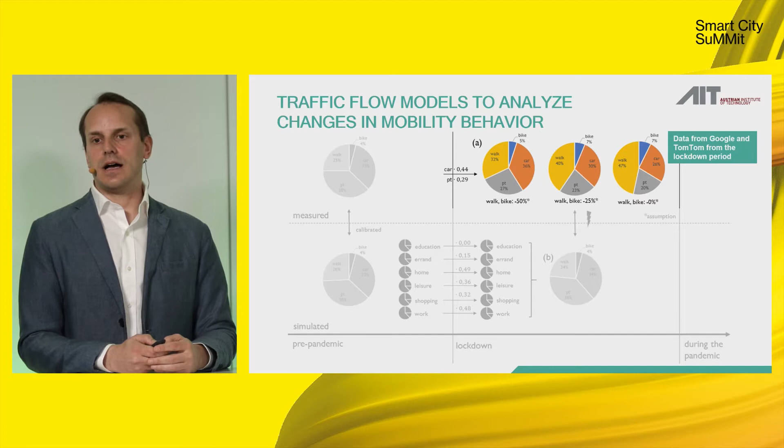If we look now during the pandemic, we collect data from Google and TomTom. They made this data publicly available, and we can use that for our research. We see how the modal shift has changed, a decrease, as we said before, in different usages of public transport. The interesting question is how we can investigate that with our model when we look into the different activities. For instance, during the lockdown, education trip purposes were completely at zero. There was a strong decrease in shopping and so on.

So there are two takeaways when we apply our simulation tool here. The first one is that if we look at the simulation model calibrated on the activities, we cannot really reflect the modal split. There is a difference between what people did in the modal split and what the model predicts, which gives us insight that we need to look into how mobility behavior has changed for each individual activity.

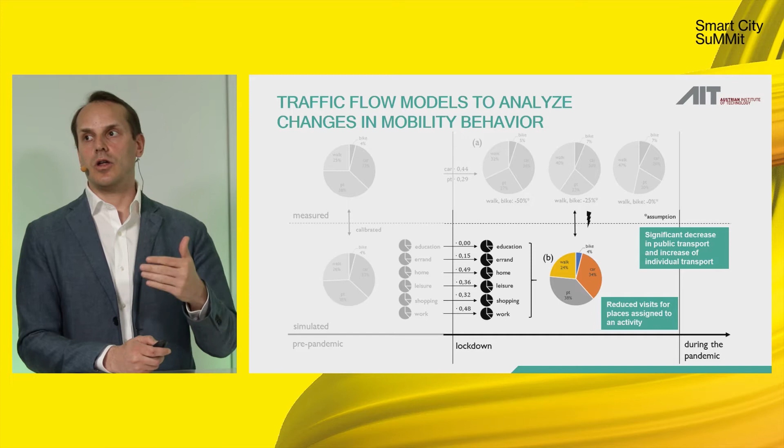The second takeaway is, with the data that we have available, we can calibrate our models and use them ideally for predictions during the pandemic, but also later on as we see a way out into a different mobility behavior. These types of models are very helpful to test and assess different strategies in our mobility system.

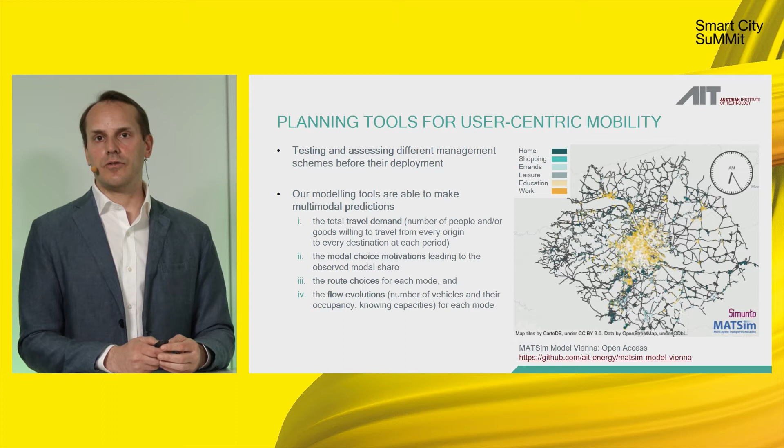They are able to represent our mobility behavior on the different choice levels, such as travel demand, how we plan our activities, but also mode choice, route choice, and finally the evaluation of the evolution of the flows. What we can see in this picture is a multi-agent simulation model, a MATSim model that we have developed for the city of Vienna, calibrated on the data of Vienna, and publicly available under the link you can see here.

This is something we do at AIT in our Urban Competence Hub, where we integrate the different domains of cities, so we can combine mobility, urban planning, energy, and climate to help cities become more sustainable and more resilient. And we have the different methods and tools to empower the different stakeholders, support decision making, and give a pathway to more climate neutral cities and sustainable living spaces.

So how are we doing this? One important tool that we have created is the City Intelligence Lab that Lena mentioned earlier. This is a digital platform that integrates different digital tools for interaction, planning tools based on simulation, and also artificial intelligence methods that can enhance and accelerate the planning process. And it's in very close collaboration with the cities, with the industry, but also with academic and research entities.

So we can see here the different impressions on the technologies that we apply, from the different visualizations towards augmented reality and virtual reality, that can help us in the planning process.

And I have brought one example from the City Intelligence Lab, our InFraReD project, which is basically the capability using a machine learning framework to have planning and simulations run in real time, so very fast, to see the outcomes if you plan cities in a different way, how that affects the different KPIs that we are interested in the city.

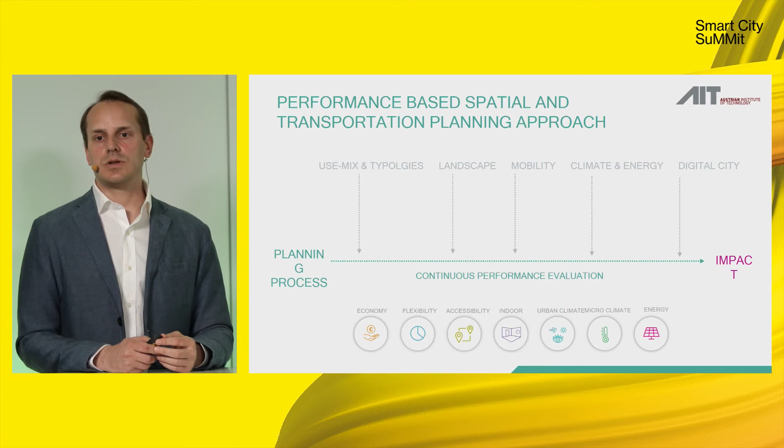So basically, our approach here is that we start with the impact at the end. So this is our main focus. And we have a performance-based spatial and transportation planning approach that accumulates all the different disciplines that we need, that we can see here, from landscaping to mobility to climate and energy and urban planning. And we can continuously assess the performance and measure it against the different KPIs that we can see here below.

And the parametric design methods that we have developed help us to understand how we can transform our urban spaces and how to efficiently develop these different design scenarios, and then also look into them in terms of solar radiation, wind flow, and so on.

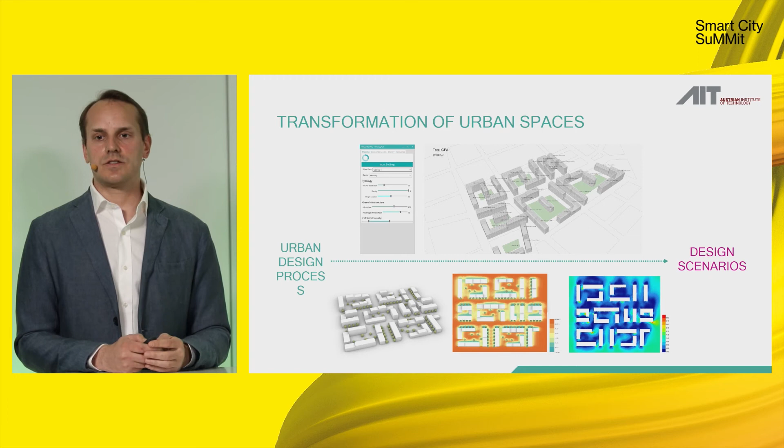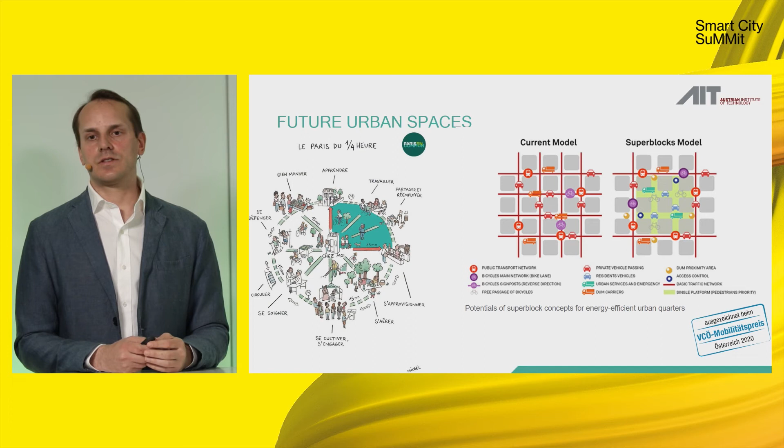Another aspect is, of course, that we can look at the impacts on accessibility on the different levels of the city. And this helps us to develop new concepts and understand how the 15-minute city or the superblock concept can help us to improve our cities also for resilience.

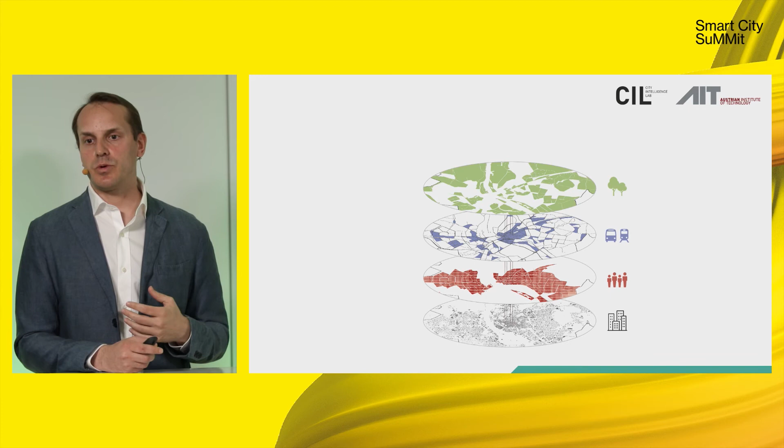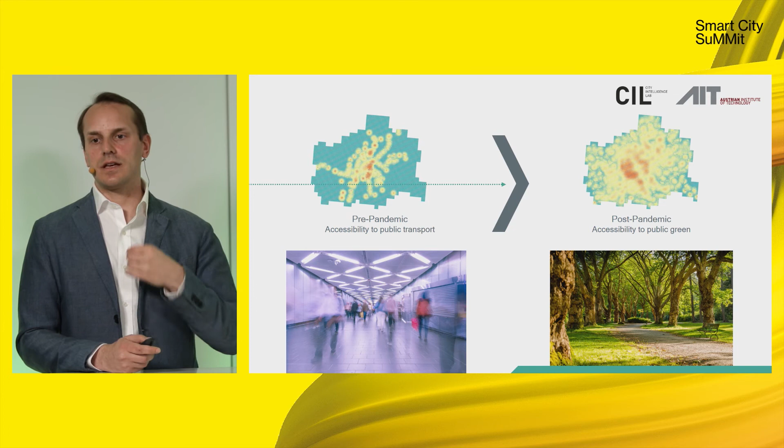How are we doing this? So we start with a layer of the built environment. We look at the demand, the public transport, the green area in the city, and then we can identify spots where we have to have a closer look. And at these spots, we can go more into the details, and we can better understand pre-pandemic, how was the use of public transport. During the pandemic and afterwards, there is a stronger need for green space. Is there accessibility for this green space as well?

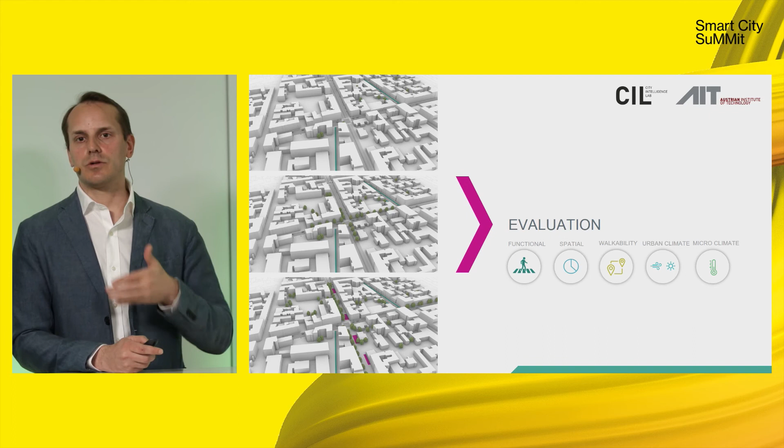So this helps us in the parametric model to look into these different scenarios and test them, also for traffic calming measures, and to evaluate the different designs on, let's say, a specific road, how we design that and evaluate it towards different KPIs.

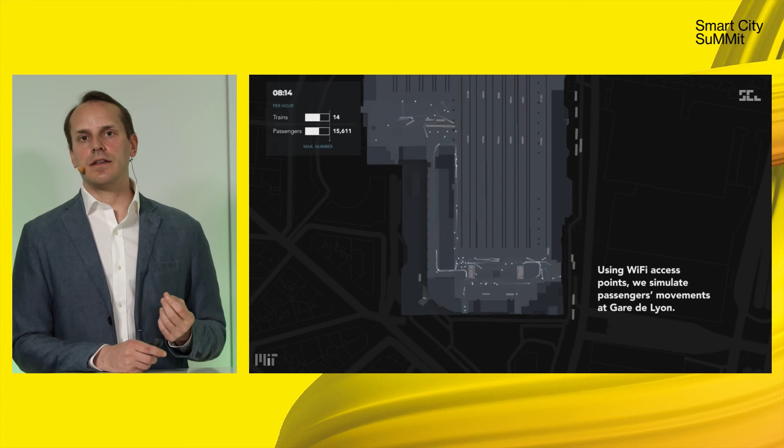Also, on the small scale, if you look at infrastructures, and this is a project that we did at Gare de Lyon with our partners from the MIT Senseable City Lab, we can better understand how people move in these infrastructures by measuring the behavior and using the simulations to extrapolate the behavior on the whole population, on the overall number of passengers in this metro station, and test different scenarios, how we can improve for transport, but also for retail purposes, and so on.

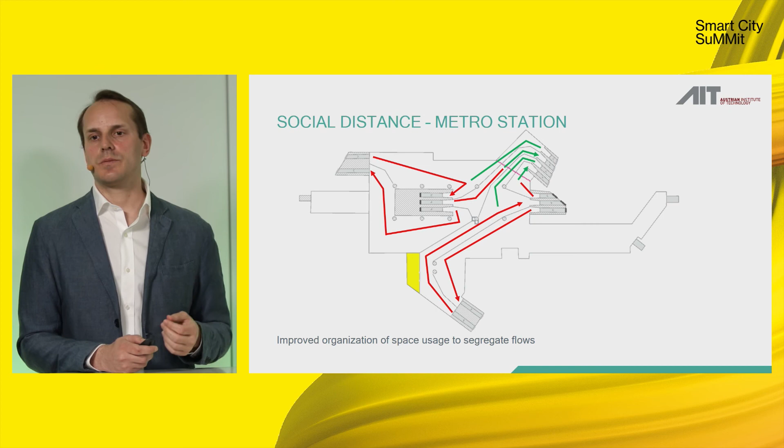This is, of course, also an impact when we look into the scenarios for COVID-19 and crises where social distance is important. So we also looked into concepts for how to improve the flows and separate them in metro stations. Here we can see a before without measures and a picture with measures to separate the transport flows, passenger flows.

And we can see that the contact times in these stations have decreased significantly, and we can see that there is an improvement, while at the same time the walking times for the passengers and transfers between the modes of transport have not increased that much. So it is a help for operating these infrastructures.

Similarly, we have implemented our simulations together with the partners from Schönbrunn Palace to support them in times where visitors need to be managed in a way that we can ensure that there is less contact, but also to give them an understanding for a way out of the pandemic when we start tourism and increase the efforts for tourism, how that can be managed in a very safe and efficient way.

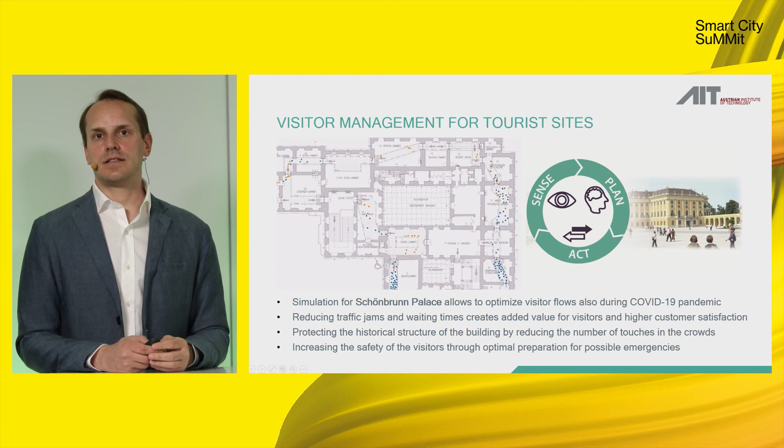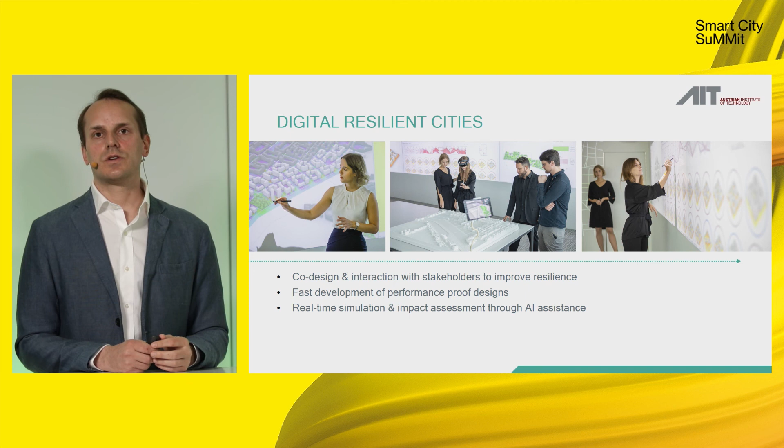So that brings me to the last slide. Clearly we can see from what we have learned from our research and the developments that these new design, co-creation and interaction methods can help us towards more resilient cities. It can also improve the design and also give a better understanding to all the different stakeholders, even in real time, to make decisions and see the impacts through the usage of artificial intelligence methods that we have developed.